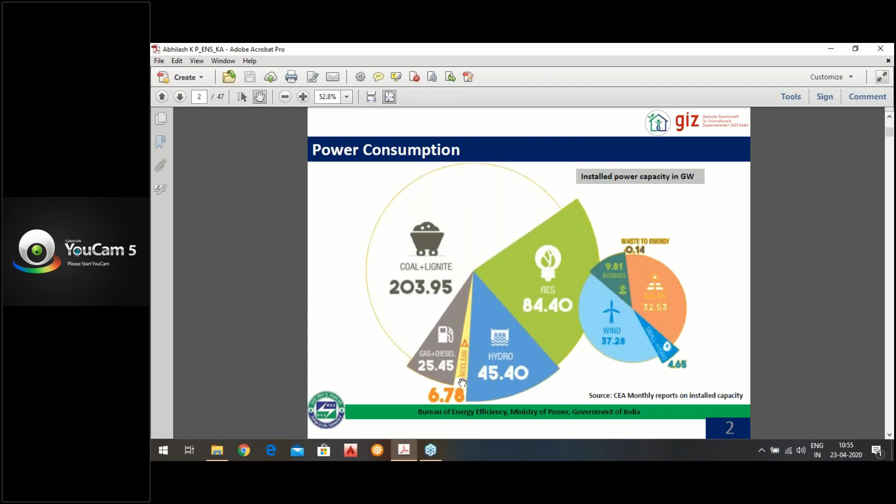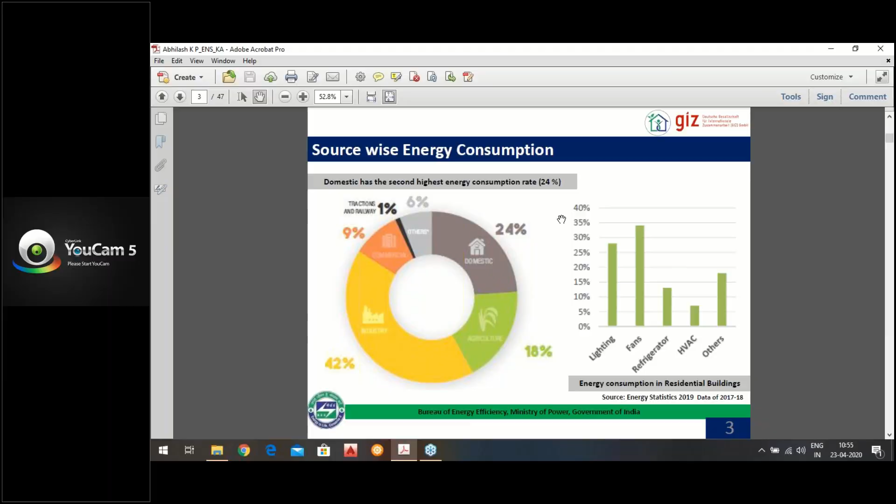If we look at the building sector, roughly 24% of energy consumption in the building sector is by the domestic sector. This is a sector that has not really been looked at from an energy saving perspective so far. So for this purpose, Eco Niwas Samhita, called ENS in short form, was launched by the Bureau of Energy Efficiency along with GIZ. This was launched in December 2018.

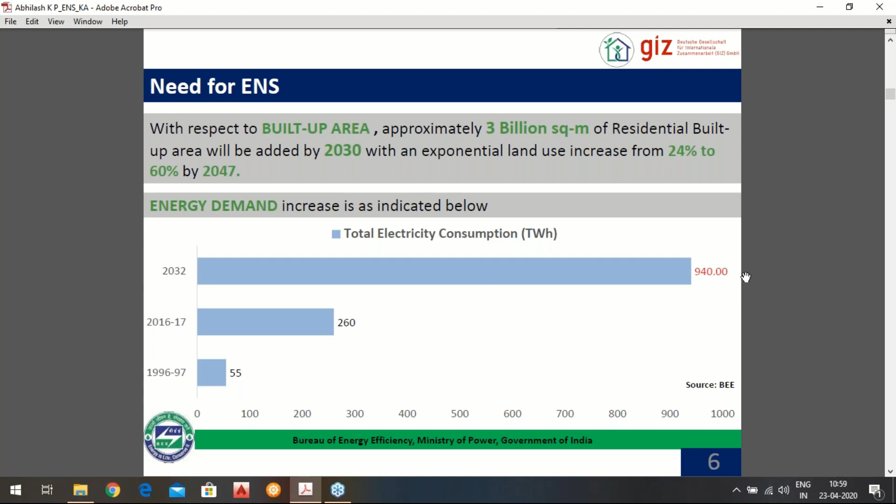With respect to built-up area, approximately 3 billion square meters of residential built-up area will be added by 2030, with an exponential land use increase from 24% to 60% by 2047. So of course the energy demand is also going to increase. By 2032, it is projected to go up from 260 TWH to 940.

So Eco Niwas Samhita covers building envelope design standards to improve energy efficiency in residential buildings. It talks about adequate natural ventilation potential that a building has by means of window to floor area ratio, and then adequate daylighting, in which window to wall area ratio is covered.

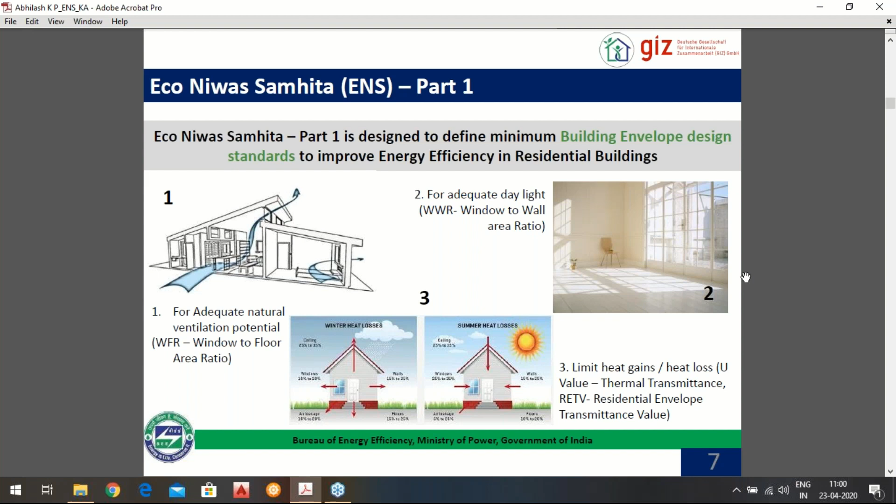A very important aspect covered here is heat gain or heat loss as per the weather. In Karnataka, except Coorg, most regions are going to be concerned about heat gain. So when we talk about heat gain or heat loss through the envelope, we are going to talk about U value and RETV, which we will cover in the later slides.

ENS is a simple to apply format. There are two ways of doing it: one is the prescriptive compliance approach, and another is the tool-based approach. Simple calculation-based inputs are taken from the architectural design drawings of the building. It does not require any simulation software, and the code can be easily adopted in building bylaws.

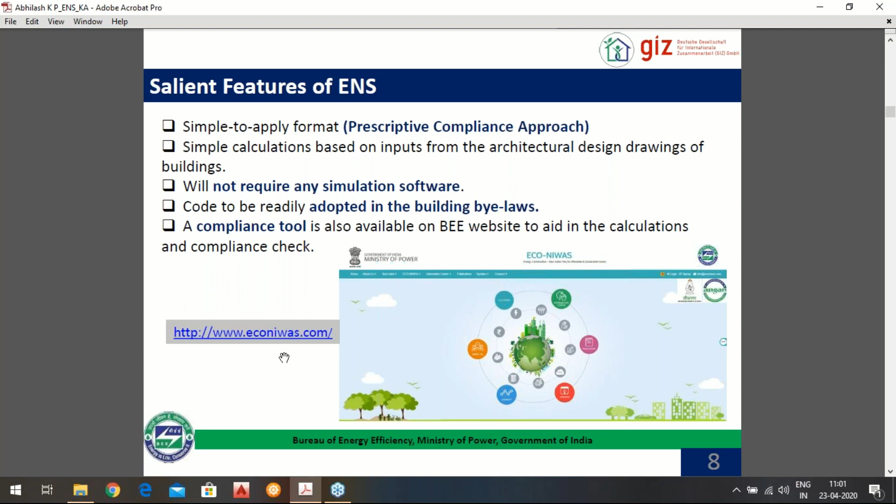A compliance tool is also available on the Bureau of Energy Efficiency website, which can be used for calculations and compliance check. You can always visit www.econiwas.com and get more details.

It is projected that at least 20% energy saving will be achieved if we go for ENS in a larger way, which the Bureau of Energy Efficiency is planning. So it is going to save at least 20% energy as compared to a typical building. Of course, if done in a better way, it can save much more than 20%.

125 billion kilowatt hour of electricity saving. Kilowatt hour is the unit that electricity is measured in. When you get your electricity bills at home, you will see that these many units have been consumed - those units are kilowatt hour. So you can imagine how much electricity saving will be achieved.

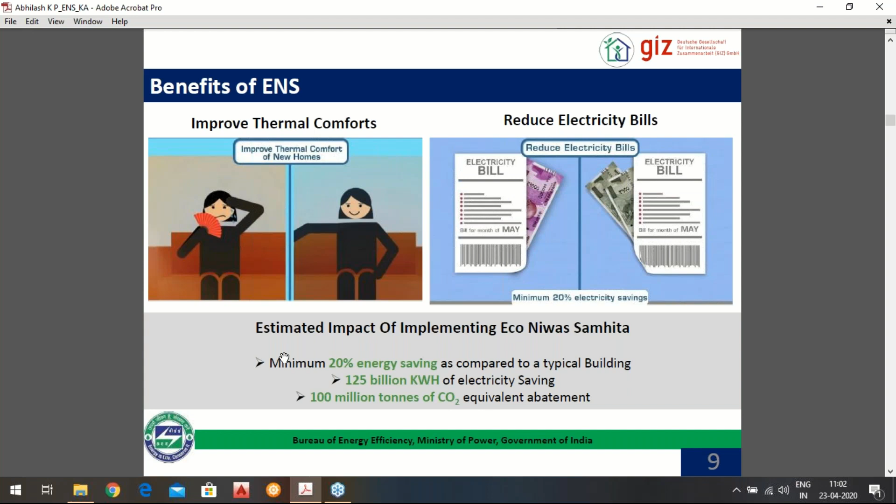It does not only save electricity, it also mitigates 100 million tons of carbon dioxide. What do we mean by mitigating carbon dioxide? It means that if we are burning fossil fuels for electricity consumption, we are releasing carbon dioxide into the atmosphere. So if we save that many fossil fuels, we save this much carbon dioxide - 100 million tons of carbon dioxide is huge.

So let's look at a conventional building versus an ENS compliant building. A conventional building will have a non-insulated roof which absorbs more heat and radiates it inside the building. It will also have conventional walls, roof, and single glazed windows, and they all trap heat. Let's talk about an ENS compliant building.

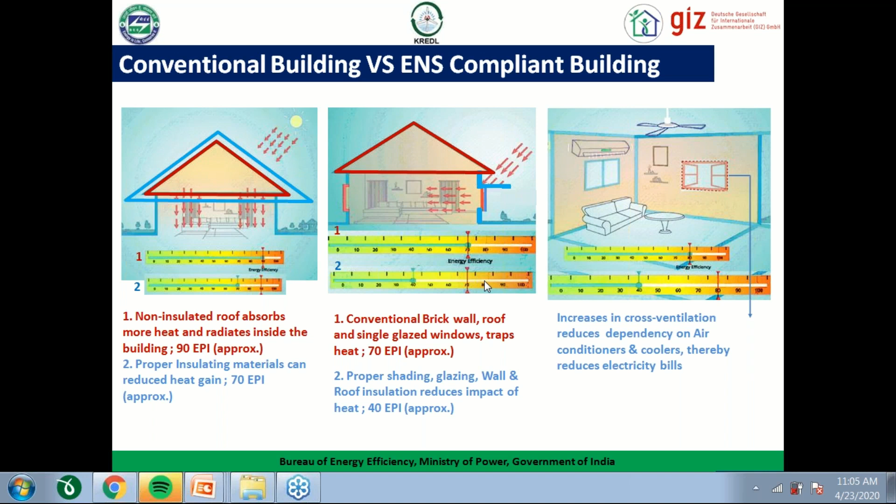An ENS compliant building will have proper insulation in the envelope so that heat gain can be reduced during summers and heat loss can be avoided during winters. It will also have proper shading, proper glazing, wall and roof insulation, and better cross ventilation, which will reduce your dependency on air conditioners and coolers.

Karnataka has all 5 climatic zones. Most of Karnataka falls under warm and humid. Belagavi is composite. Hot and dry we have Tumakuru. Temperate we have Bangalore and Mysore. And cold is Coorg district. So this code is applicable to all 5 climatic zones.

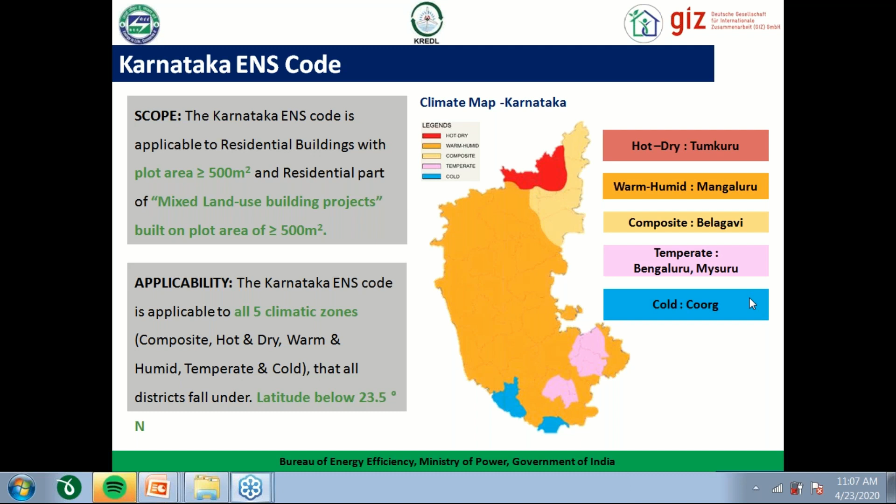The latitude is below 23.5 degrees. There are certain tables in the code which talk about latitude specific requirements also, which we will be seeing.

The code basically covers these factors for the building envelope: window to floor area ratio for natural ventilation, visible light transmittance for daylight potential, and of course thermal transmittance.

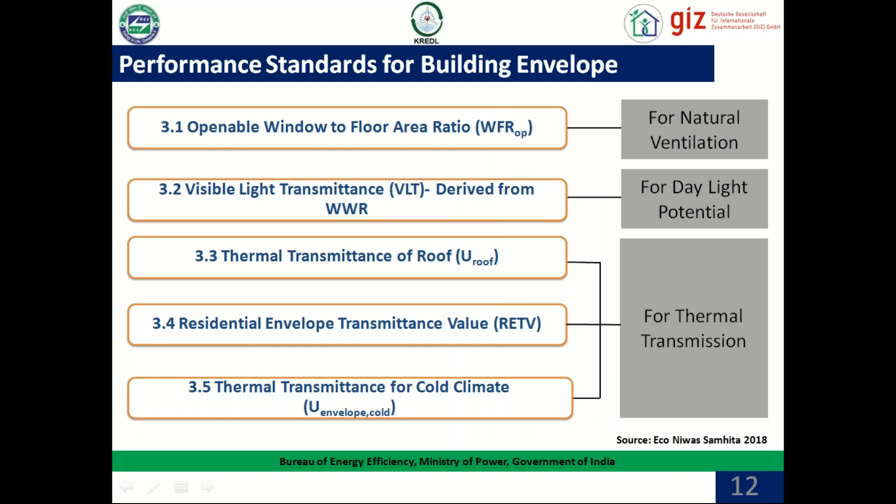Let's come to the first part, which is window to floor area ratio. This is a very simple ratio. It is the percentage of your openable windows, the openable area. There is emphasis on openable window, because in a window you might have some fixed glazing, frames and other obstructions. So it is only the actual openable area divided by the carpet area of your building.

So in the openable area, your entrance door is not included in this calculation because you're not going to keep it open. All your windows, ventilators opening directly to external air, open balcony, open corridor, shaft, and doors opening directly into an open balcony are all included. When we talk about carpet area, we are not including the balconies; we are only talking about the total internal area of habitable space.

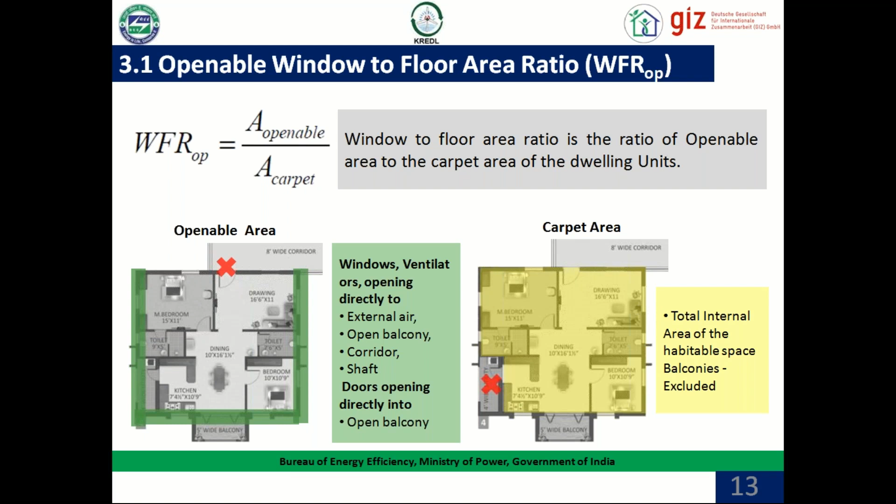So for different climatic zones, we have different minimum window to floor area ratio requirements. This is to ensure that adequate natural ventilation is met, there is an improvement in thermal comfort, and it will lead to reduction in cooling energy loads. If you have good natural ventilation, you will not require so much air conditioning.

Let's see the table on the left. We can see that composite climate has a minimum window to floor area ratio of 12.5%. Hot and dry it is 10%, warm and humid is 16.66% — because in warm and humid climate you require more natural ventilation due to the humidity content. Temperate again requires 12.5%, and cold climate is less, 8.33%, because if you have more ventilation your building might cool up fast in cold climates.

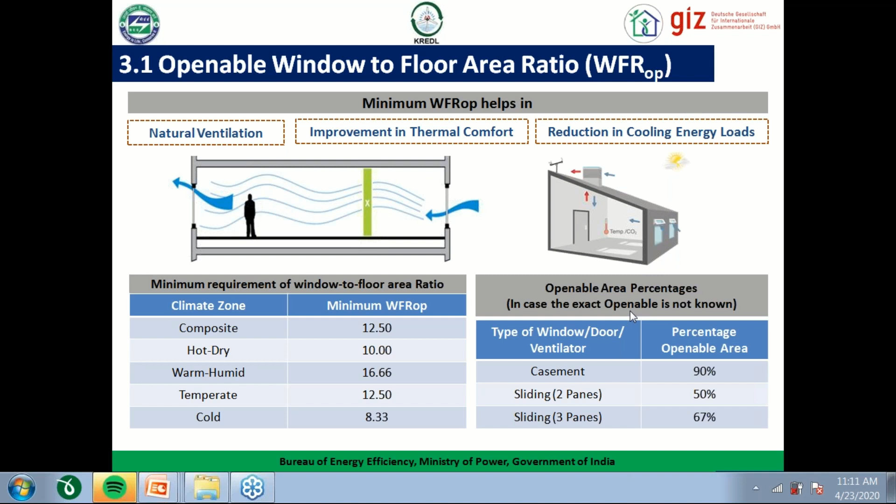Let's look at this example. This is a dwelling unit situated in Belagavi, Karnataka, which is composite climate. We have taken the example of Karnataka because it doesn't matter — we are only talking about the climatic zones.

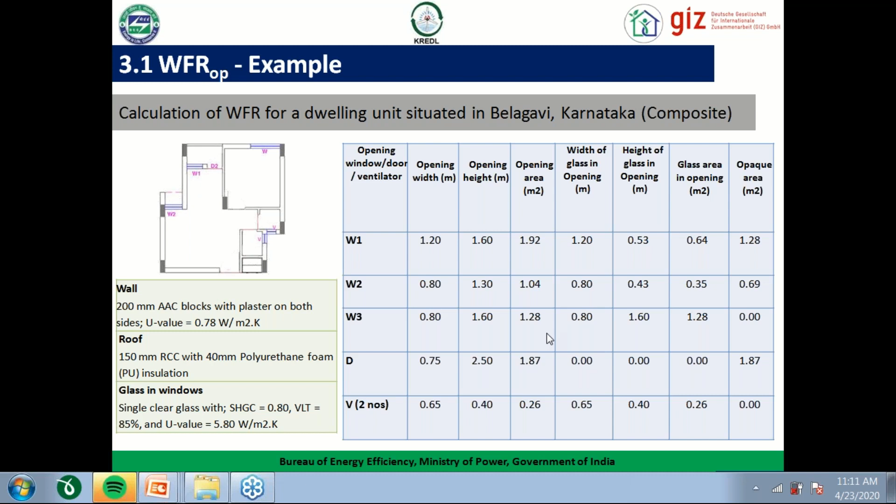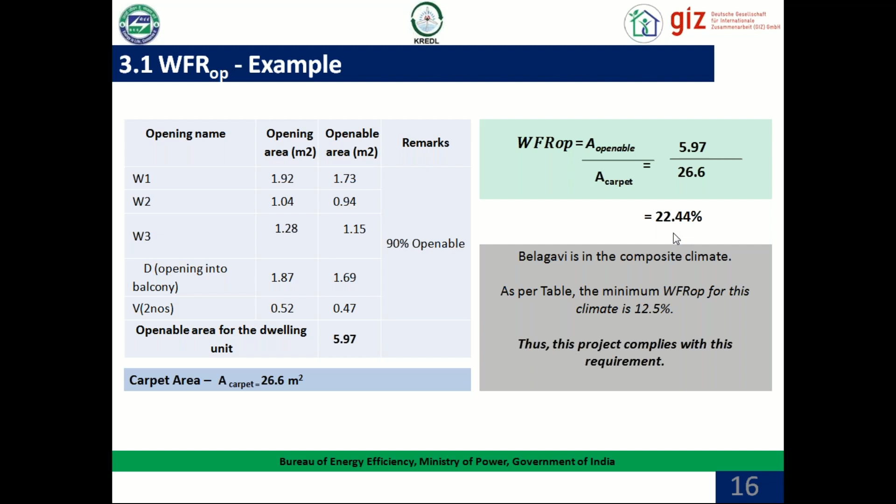Over here, the total windows area or total opening areas were written down, and the total openable area was calculated, which is approximately 90%. Then the window to floor area ratio was calculated — we can see the calculation on the right. As per the table, the minimum requirement is 12.5%, so this is complying with the requirements.

Let's talk about window to wall area ratio and how it has been related to the minimum VLT. First, I'll explain what VLT is — visible light transmittance. It is basically how much visible light is coming inside your windows; that percentage is your visible light transmittance.

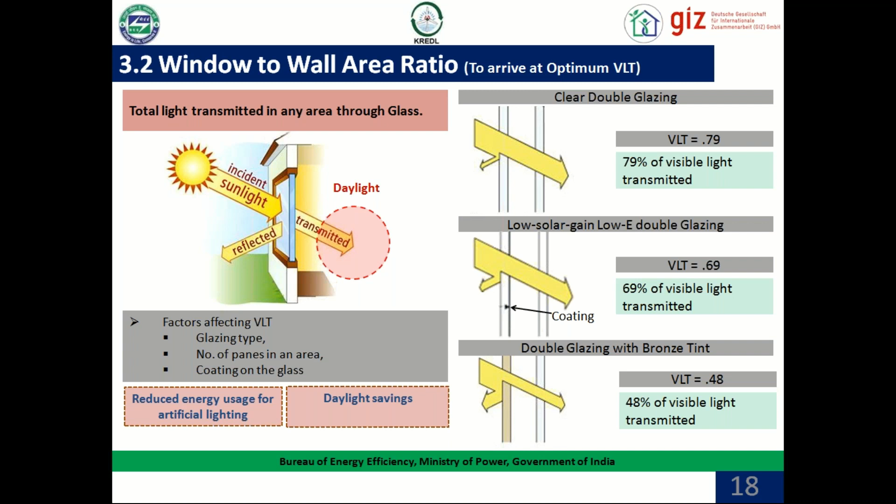Here minimum VLT has been provided. Why is that so? Because the intent is to maintain adequate daylight inside the building. So the more window to wall ratio you have, your glass can have lesser VLT properties.

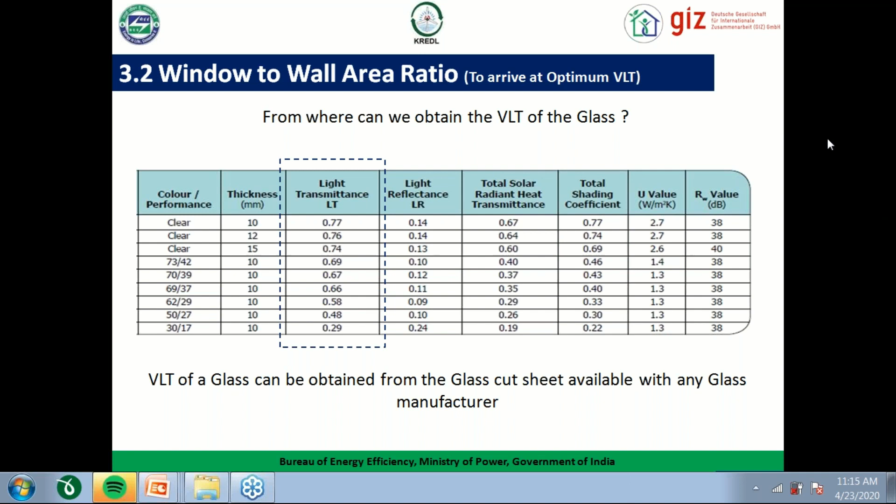Let's look at the last case, 30 by 17. This is a high-tech, high-performance glass. Light transmittance is 29%, which is very low compared to the first glass. However, if we look at the solar radiant heat transmittance, it is also very low, 19%, compared to the first case. So we can see there is some kind of direct relation between the light transmittance and the solar heat radiant transmittance. The thing is, if we go for very high-tech glass, we might have to do a little compromise on the VLT.

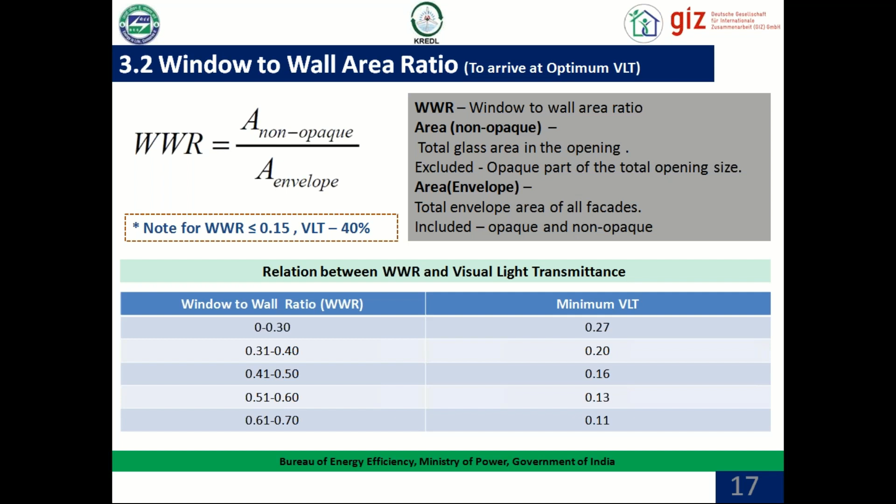So this table was given, where we can see that if you have a window to wall ratio from 0 to 30%, you ought to have VLT of at least 27%. If you have a window to wall ratio of 51 to 60%, then your VLT can go down to 13%. And if you have a window to wall ratio of 61 to 70%, then you can further go down to 11% as your minimum visual light transmittance.

So let's look at a sample window to wall ratio calculation. We calculated the total window area, that is non-opaque window area—if you have frames and all, that will not be calculated. You then divide the total by the total wall area. Here we can see A envelope, that means area of the total external envelope, only walls area. So the total window area divided by total wall area has been calculated, and it has come out to be 0.073, that is 7.3%.

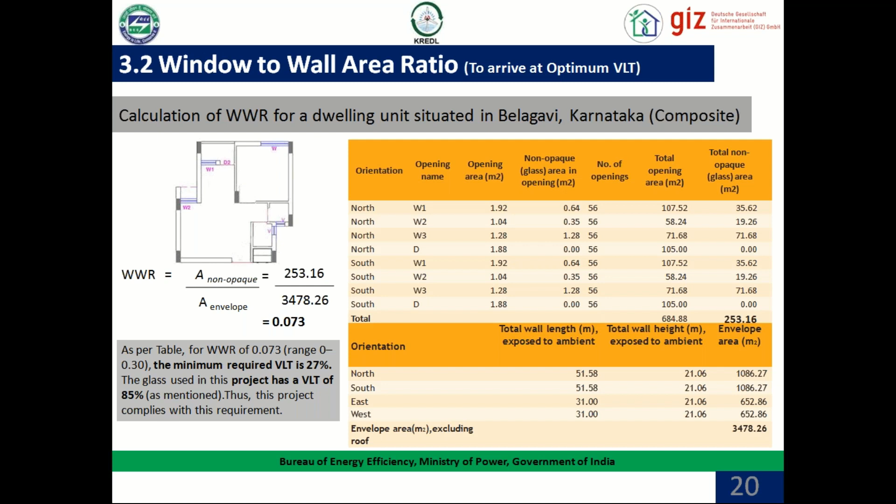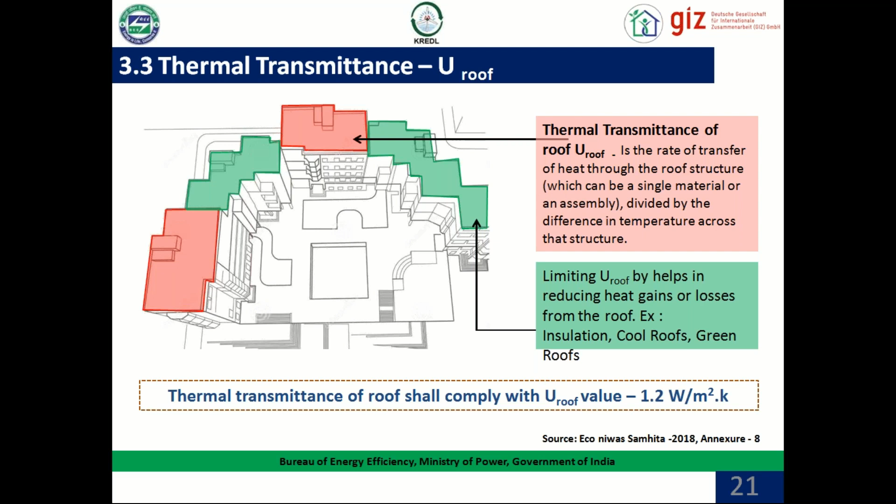So for roof, the maximum thermal transmittance value has been given as 1.2 watt per meter square Kelvin. Now, what is a U value? What is thermal transmittance? Let's look at that through this example.

Thermal resistance is the resistance of a material towards heat—how much heat a material can resist. Now, thermal resistance is inversely proportional to thermal transmittance. How much heat a material can resist is going to be inversely proportional to how much heat a material can transmit.

So first we are going to calculate the total thermal resistance of this composition. When we are talking about thermal resistance of a roof, we are going to talk about the entire composition rather than individual materials. China mosaic tiles will have its own resistance, concrete will have its own resistance. So to get the total resistance, we are going to add the resistances of all these materials as per their thickness and their resistance properties.

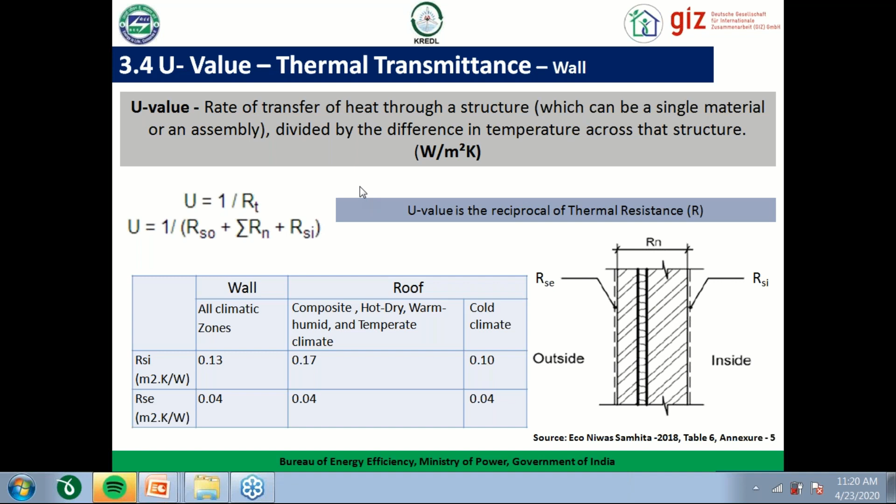So now we need to calculate the total U value. It's simple: we got the total thermal resistance as 2.127, we are going to inverse it, and we get 0.47 as the total U value of the roof. Now, the units of U value are watt per meter square Kelvin.

So it simply means how much heat it transmits. Now heat is a form of energy, right? So one of the units of energy is watt. So how much heat will it transmit if there is a temperature difference of 1 degree from outside to inside, in 1 square meter area of that particular material. That is your U value, and resistance is the opposite of it. The values are also opposite of it. Meter square Kelvin per watt, right?

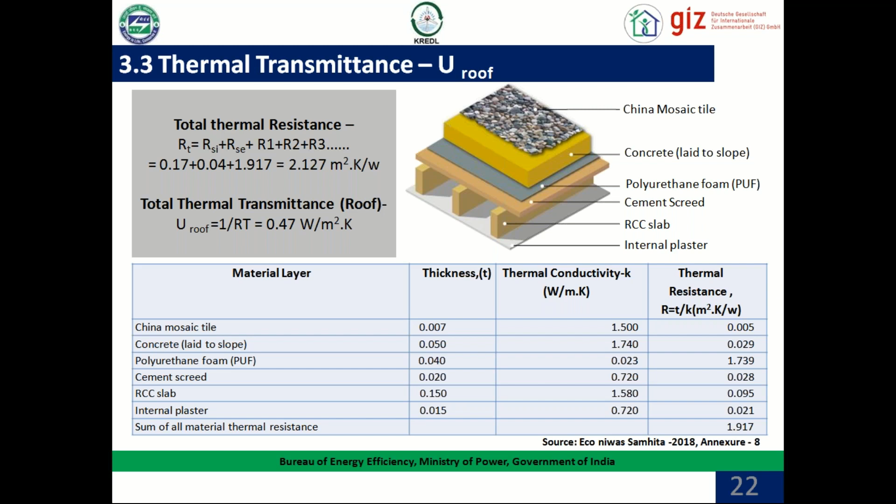So next we come to RETV. RETV is Residential Envelope Transmittance Value. It simply means how much thermal transmittance your envelope is going to have. Now, when we are calculating RETV in this particular case, we are not going to include roof in this calculation. What is the reason for that? Because we have already defined a value for roof. So RETV is a composition, a total of all the other factors that account for total thermal transmittance of the building envelope.

What is a building envelope? Building envelope is the outer covering of a building. Like we have an envelope - an envelope is always the outer covering of something, if we put documents in an envelope, so the envelope becomes the outer covering, right? So in a building, when we say building envelope, what are the components of the outer covering? We have walls, we have roof, we have openings.

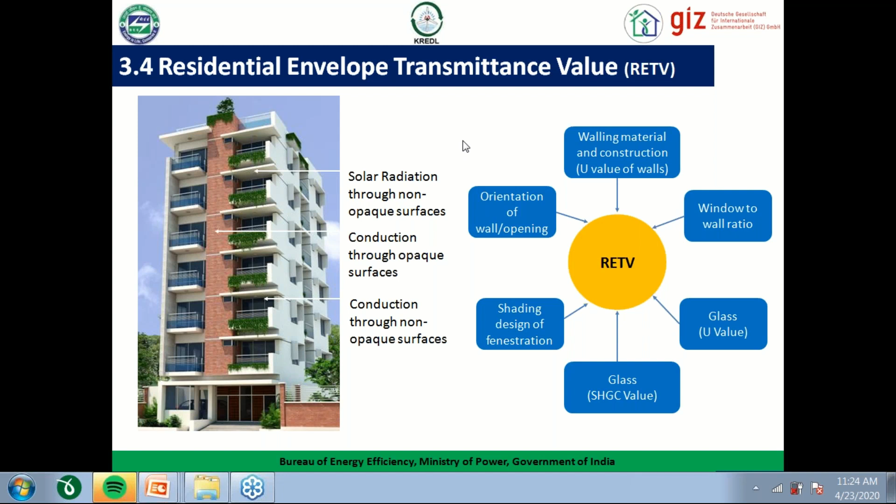So when we are calculating RETV, we already have a separate value given for the roof. We are going to calculate the factors of the other components of the building envelope, that is your openings and walls. So let's look at the calculation first.

When we look at the calculation, it looks scary. It's not scary, it's very simple. Let me explain it. It simply says RETV is equal to 1 by area of your envelope. Now in this area of your envelope, you are not going to include your roof. You're only going to include your total wall area, including the windows. So 1 divided by that area, multiplied by A. Now A is a coefficient - what is that coefficient? I'll come to that later. A coefficient into sum of different types - let's assume we have only one type of wall over here. So A coefficient into area into U value of that wall, into WI. What is WI? It is orientation factor, that I'll come to in the next few slides.

Plus B coefficient into area into U value of the window into the orientation factor, plus C coefficient into area of the window into solar heat gain coefficient into the orientation factor. Now I have already explained what is U value. I will explain what is orientation factor, and I'll also explain what is solar heat gain coefficient later on. It will be explained within this presentation only, so stay with us.

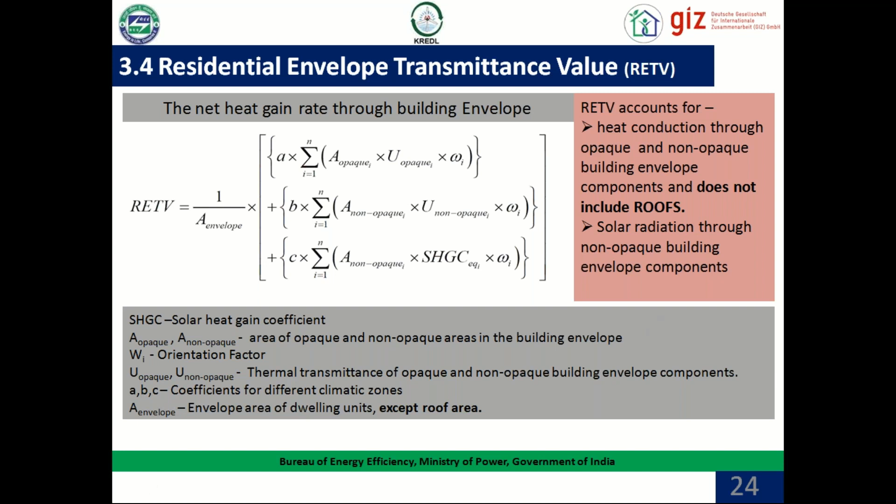Now let's look at the different types of walls with their different U values. This will give a better understanding of what is a U value and how it really affects us. Now my first question to everyone is, which of course you cannot answer now, but I want you to think about it - what do we want in our envelope? Do we want a higher U value, or do we want a lesser U value? So U value, I'll repeat, U value is the thermal transmittance of a material.

I'll also give an example as a hint. In our school times, we used to study that metal is a good conductor of heat, that means metal can conduct or transmit heat easily. That means metal has a higher U value. Wood is a bad conductor of heat, that means wood has lesser thermal transmittance properties and it has higher resistivity to heat, higher resistance to heat.

I'm sure you must have already thought about whether we should have a higher U value in our building or lesser. The answer is obviously we should have lesser thermal transmittance in our building envelope. We don't want to live in metal boxes, do we? No, and that was just an example. What I mean is that the lesser the U value, the better our envelope is. It will protect us from heat gain during summers and heat loss during winters.

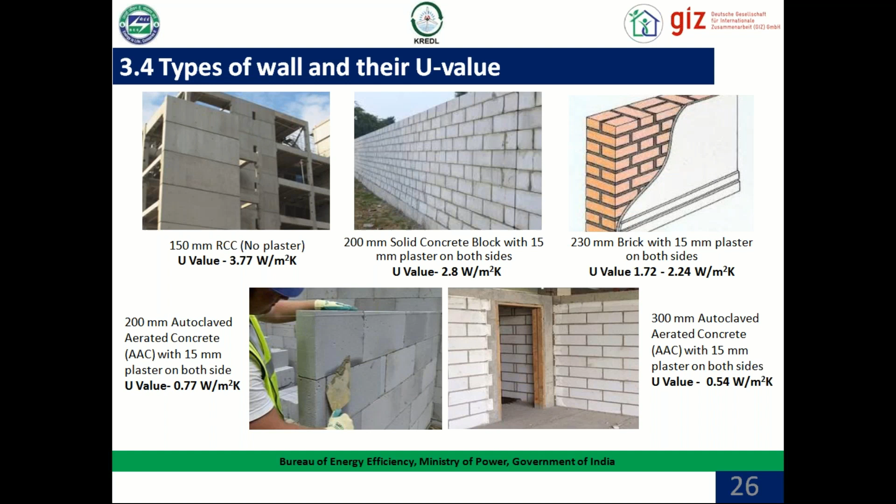Having said this, I want to add something we were going to talk about later on: the ECBC code is actually material neutral and technology neutral. You can use any materials. The end goal is to actually get the correct values and have an overall better envelope so that we can reduce energy consumption.

We have talked about thermal transmittance of walls, and of roof. Let's talk about thermal transmittance of a window. There are actually three types of heat gains through windows. Before that, I would like to ask, and you can answer this to yourself, what are the three modes of heat transfer? They are conduction, convection, and radiation, right?

When we talk about conduction, conduction is heat transfer by direct touch of one material to another, from one molecule to another molecule.

Now when we talk about convection, it happens through currents. It could be air currents or fluids, so in the building case, of course, it is going to be through air currents. How does convection play a role in heat gain or loss in a building? If you have some air leaks in the window to frame or other parts of the envelope, then you're going to have air leaks, and it will account for some heat losses or heat gains as per the weather conditions. Also, as I mentioned earlier, there is an air film right next to any surface, so over there also convection is happening, right?

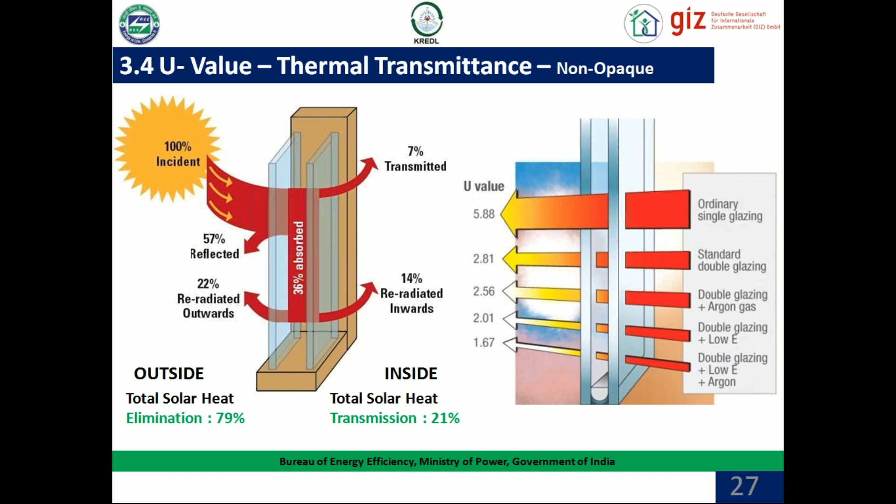Coming to a very important aspect - windows, as I just said, get direct solar radiation inside through the sun. Some of it is reflected, some of it is absorbed, and some of it is directly coming inside. Now that percentage of radiation that is coming inside, either directly or absorbed and then coming in, the total heat that is coming inside - that percentage is called your solar heat gain coefficient.

Simple calculation is, let's say out of 100% solar heat falling on your window, about 20% gets reflected back. So your solar heat gain coefficient will be 80%, or 0.8. So obviously the lesser the solar heat gain coefficient, the lesser the heat transfer. That is what we want in our windows - that it should have a lesser solar heat gain coefficient.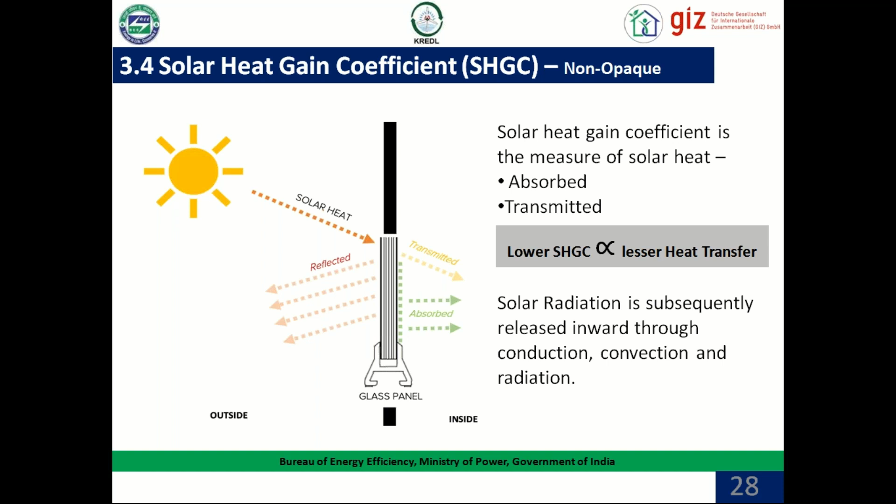Now this was talking about the window in isolation, when there is no shading. Now if we add shading, the solar heat gain coefficient should reduce. How much should it reduce? There is a very simple calculation for that to account for the projection, called the projection factor. It is the ratio of your projection, the overhang, divided by the height of the overhang from your sill level.

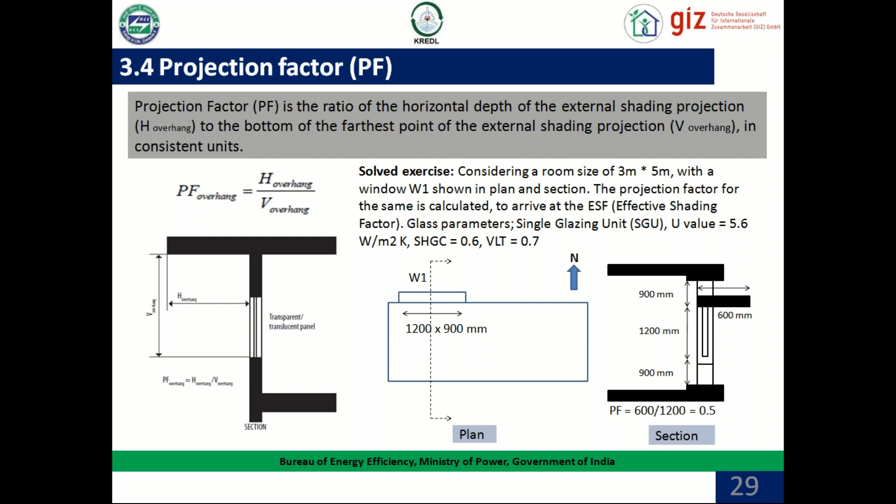Let's look at the left image first, where the lintel level of the window is a little lower, but the projection is higher than that. So we take this entire height from the sill level to the bottom of the projection. Now let's look at the second case, the image on the extreme right, where the lintel level and the projection level are the same. There we have taken 600 divided by 1200, so the projection factor has come out to be 0.5.

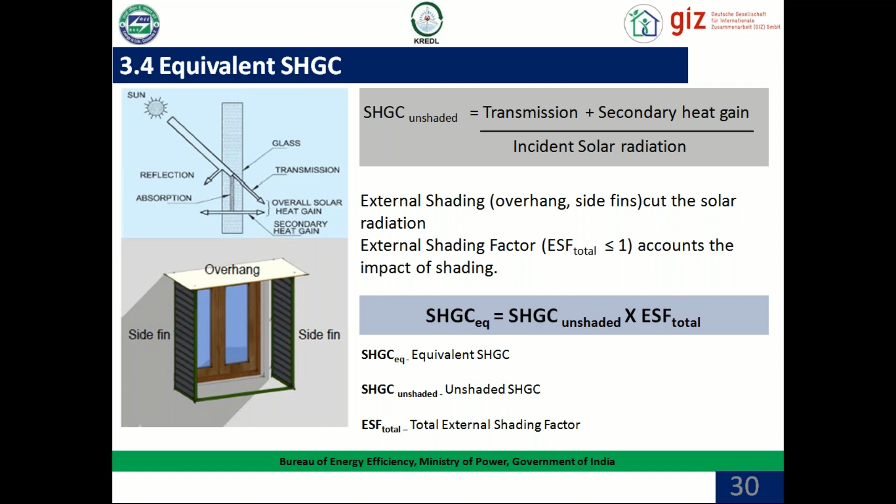So your solar heat gain coefficient for an unshaded window is what I have already explained. Now if you have an overhang, we have an external shading factor that we multiply our solar heat gain coefficient of the window with, to get the equivalent solar heat gain coefficient. Now how do we get this external shading factor? We have a table for that, since we already know how to calculate the projection factor. Next slide, please.

So we have this table given for latitude of Karnataka, which is less than 23.5 degrees. If our projection factor, from the example we had taken, had a projection factor of 0.5, right? Let's say it was a north window. I think it was a north window. Yeah, it was a north window.

So we are going to have our external shading factor. This is going to be the external shading factor, that is 0.820, the one that is highlighted. So we calculate our solar heat gain coefficient with our external shading factor, and we get the equivalent solar heat gain coefficient. Now can we see that initially our solar heat gain coefficient was 0.6 and now it is 0.492? So it is considerably less than the original solar heat gain coefficient. So without spending a lot on high efficiency window sections, we can simply introduce shading devices and still get the desired results.

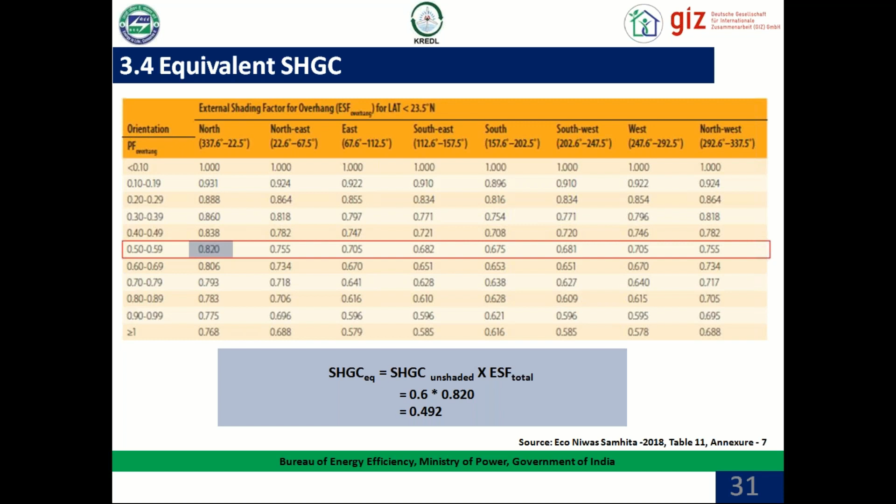Now coming on to the next factor, that is the orientation factor. If you remember in the calculations we had seen omega - this orientation factor is basically the measure of the amount of direct and diffuse solar radiation that is received on the walls in a specific orientation. So we are going to look at the table for latitudes less than 23.5 degrees. Here we see that let's suppose our building is oriented in the northeast orientation, so our orientation factor comes out to be 0.906.

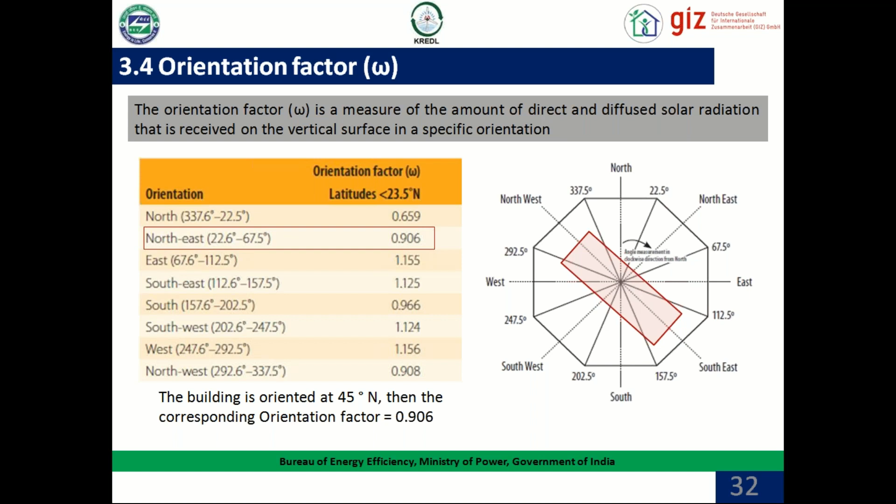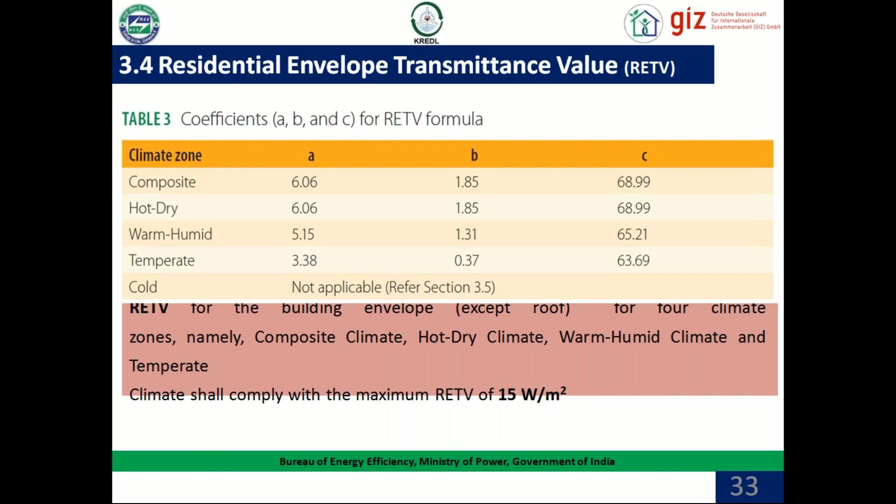This factor we are going to use in the calculation for RETV that we had seen earlier. We had also seen coefficients A, B, C in the RETV formula, which I had mentioned differ for each climatic zone - those coefficients can be taken from this calculation. Now, the maximum RETV allowed for the 4 climatic zones - composite climate, hot and dry climate, warm and humid, and temperate climates - they should have a maximum RETV of 15 watt per meter square.

For cold climates, we have a different requirement where the thermal transmittance of the building envelope shall comply with a maximum of 1.8 watt per meter square Kelvin. Now this is different from RETV - this is basically the U value for the entire envelope. So it is U value of envelope in the cold climate except the roof part. This calculation equals 1 by area of the envelope except the roof part, into U value of walls into area of walls plus U value of window into area of window plus all the different types of components. That should be a maximum of 1.8 watt per meter square Kelvin.

We have this plan on the left where we can see that the opaque wall area is 2793.38 square meters, and the U value of that wall is 0.78 - it is an AAC wall. Door is a wooden door, opaque door - area is 210 square meters and U value is 5.23 watt per meter square Kelvin. Then we have the window, the non-opaque, transparent part - area is 475.88 square meters and the U value is 5.8 watt per meter square Kelvin.

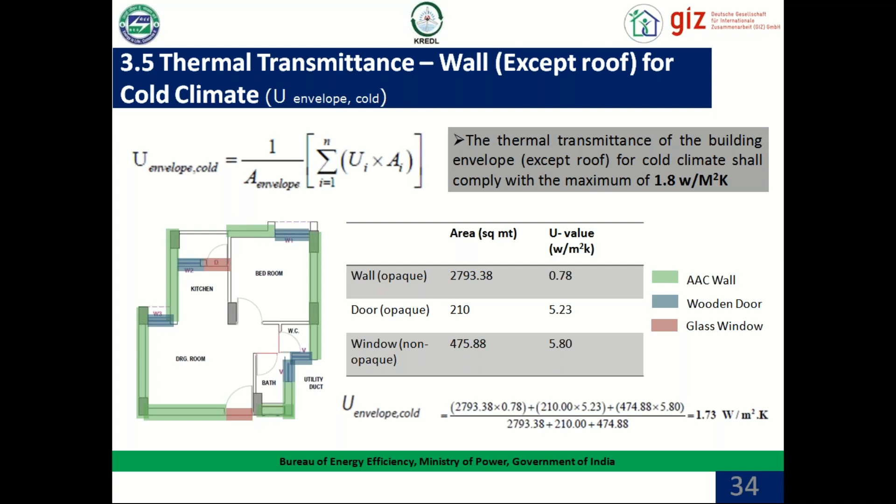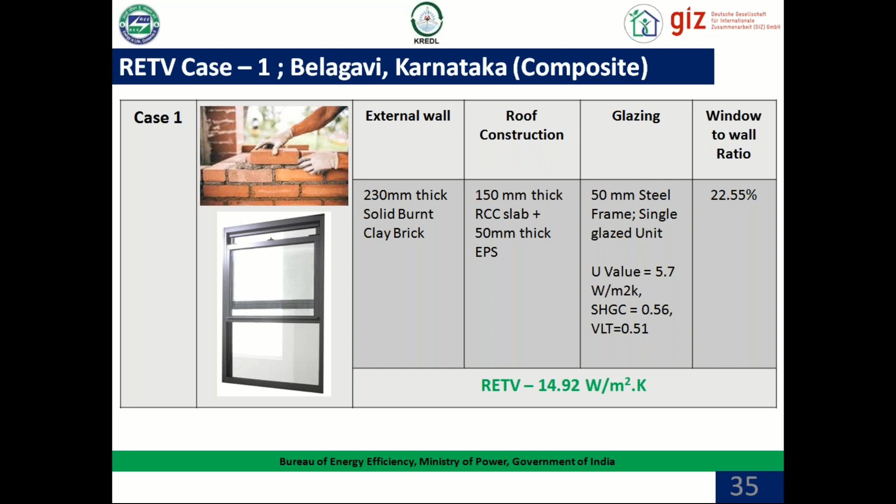Glazing is 50 mm steel frame with single glaze unit. U value is 5.7 watt per meter square Kelvin, SHGC is 0.56 and VLT is 0.51, and window to wall ratio is 22.55%. RETV is coming out to be 14.92, barely within the range.

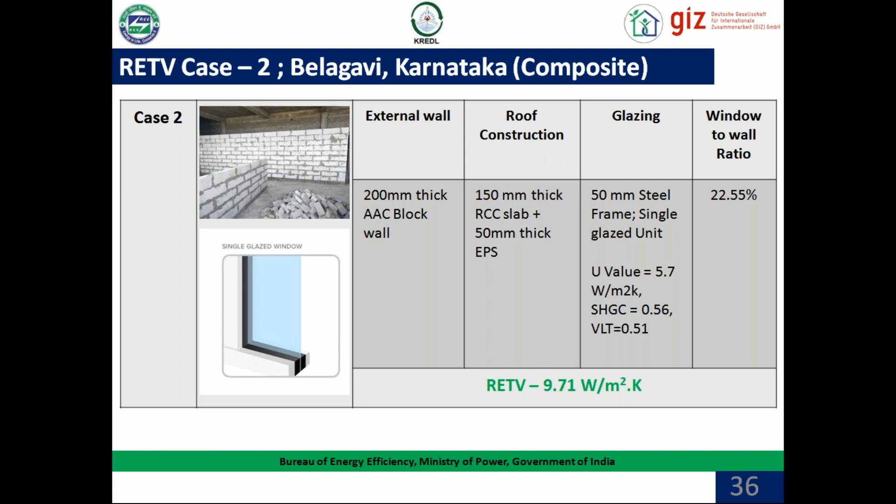So in the second case we have here, the external wall was changed from a normal brick wall to a 200 mm thick AAC block wall - nothing else was changed. By doing only this, the RETV came down from 14.92 to 9.71. Big change. Now let's look at case 3, where we have a 200 mm thick AAC block wall - nothing was changed here, window to wall area ratio remains the same.

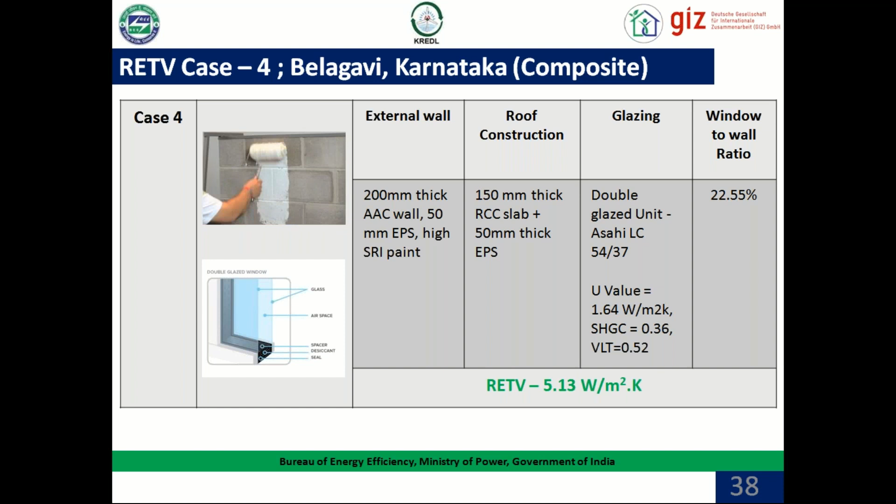Going to the fourth case, what changes were made here? Window to wall ratio remained the same, glazing remained the same as the third case. Only high SRI paint was applied on the external wall.

What is high SRI paint? This is solar reflectance index, meaning it has a high solar reflectance index. So the walls were reflecting solar heat falling onto them. By that only, we were able to save, and the RETV came down from 6.62 to 5.13.

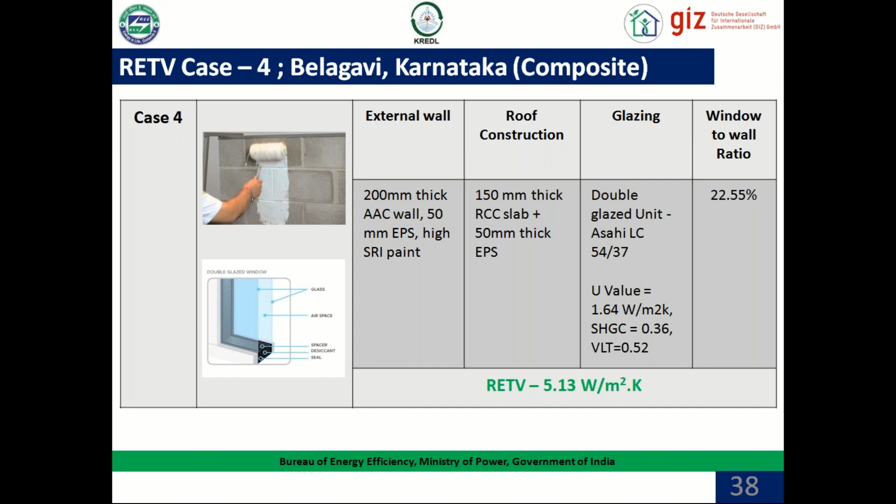Now you can compare all the four or five cases, as many as you like, and see which is most viable for your requirements. You have to look at all the aspects: area, cost, RETV, electricity saving, whatever. You have to look at all the parameters and then take your call, as long as it is falling within the compliance parameters.

Coming to the compliance approach, before that I would like to add that building design flexibility is given by this ENS tool. So you can have any type of material for wall assembly, any design of window panels, any type of shading for external windows, and any type of glazing. As I mentioned earlier, this is a technology neutral as well as material neutral code. So it is completely up to you which technology to use.

Now let's look at the compliance approach tool. This tool can be downloaded from Bureau of Energy Efficiency's website. The link is given at the bottom of the screen. I would pause here for a minute so that you can note down this link.

It is https, beeindia.gov.in, slash content slash ecbc-residential.

So we can see over here, it's a Java based compliance check tool. It's an offline tool, you download it and you use it. It's a very simple tool, like filling an online form. If you have filled earlier, I'm sure you have filled many online forms earlier. So it's like putting in various information and attaching some documents.

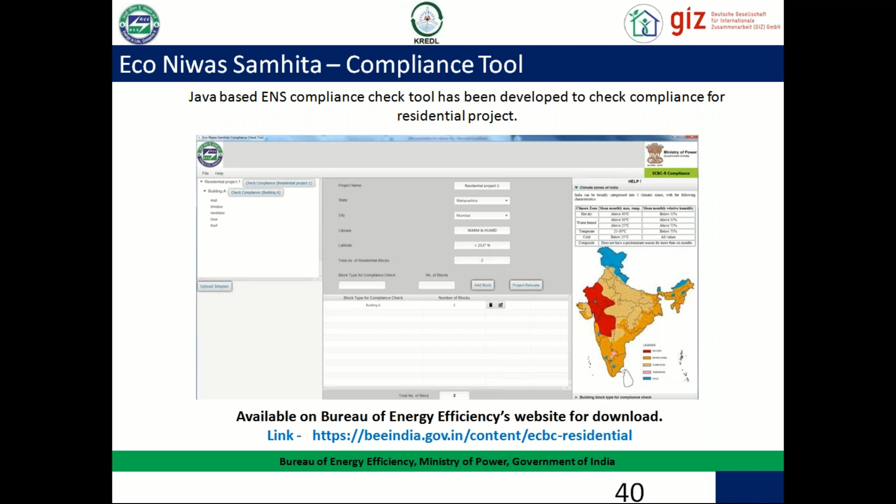Let's look at the climate zone map over here. It has this kind of map given over there, and when you input the location and other details, it automatically picks up the climate information.

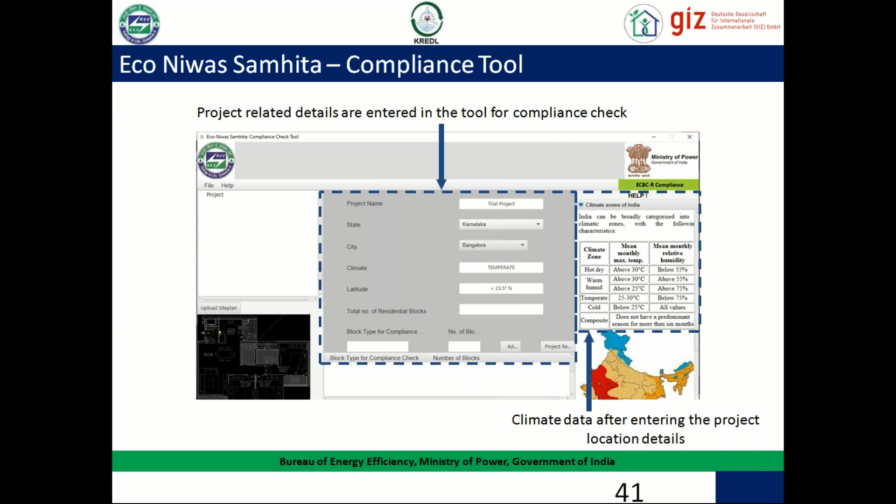Now this is an example from Karnataka only. State Karnataka, city Bangalore, climate temperate, latitude is less than 23.5 degrees. Then you start putting in other information like total number of residential blocks, block type for compliance, and number of blocks, and all the other information that we can see over here.

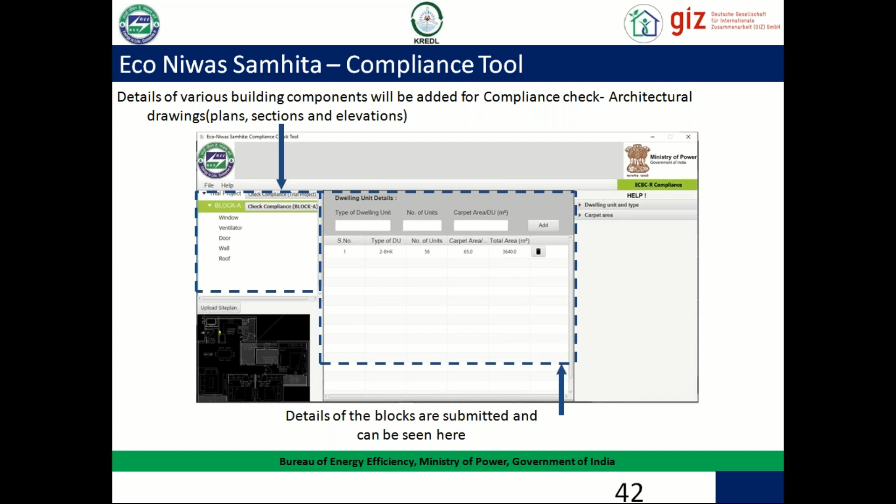Type of dwelling unit, and then we have to upload the architectural drawings, that is your plans, sections, and elevations. Then we input different window sizes, window types, shapes, glazing percentage, and all the information required. Wall type, roof type, door type, information for individual components like ventilator, all this information has to be put in.

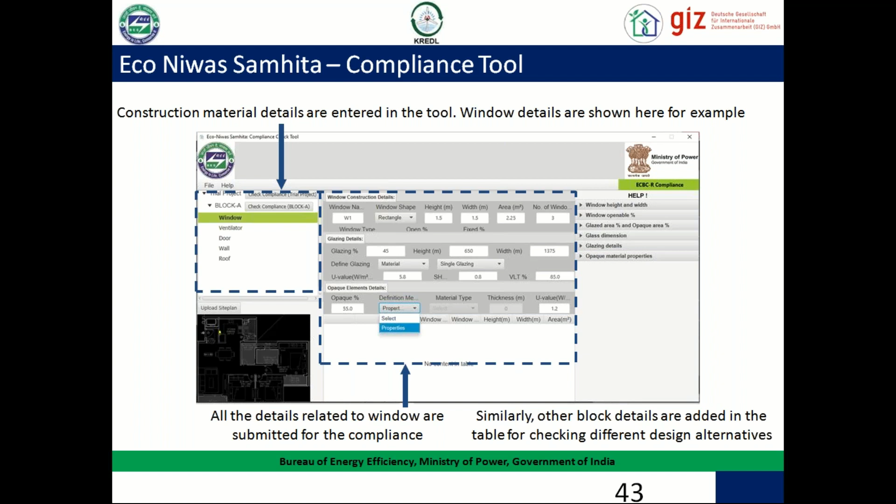I would also like to add one thing: when you download the tool, you can also download the 2-minute tutorial video, and then you can see how this tool actually works. That 2-minute video explains it very well.